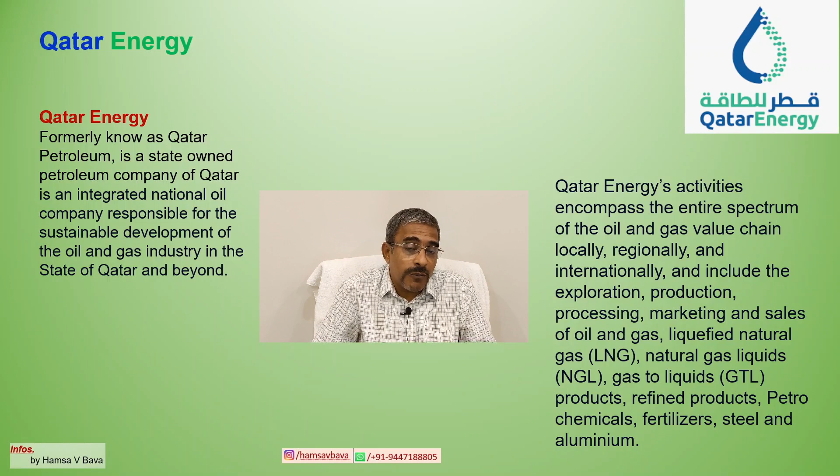One of the world's largest LNG plants is in Qatar. Plus, they have GTL technology there, which is second or third in the world, and the first GTL technology in the Middle East, gas to liquid. We will see what that technology is: it's used in Qatar to convert hydrocarbon, natural gas and condensate into value added and low emission environment quality fuels.

Qatar's hydrocarbon reserves as of December 31, 2019 (data may slightly differ) show confirmed hydrocarbon reserves of approximately 388 billion barrels of oil equivalent. This reserve consists of approximately 1763 trillion standard cubic feet of natural gas, which is their important and huge asset, and 2.23 billion barrels of crude oil and 71.93 billion barrels of condensate. So Qatar is a gas rich country.

They are operating both offshore and onshore. Looking at this overview of Qatar's operations, onshore they have Dukhan, one of the biggest oil fields in the Middle East, in the Dukhan area. Offshore, they have many platforms and production facilities.

Other than this, North Field is a huge gas reserve, and these reservoirs are there. Onshore, they have various other operating facilities. Let us see one by one how to understand each of them.

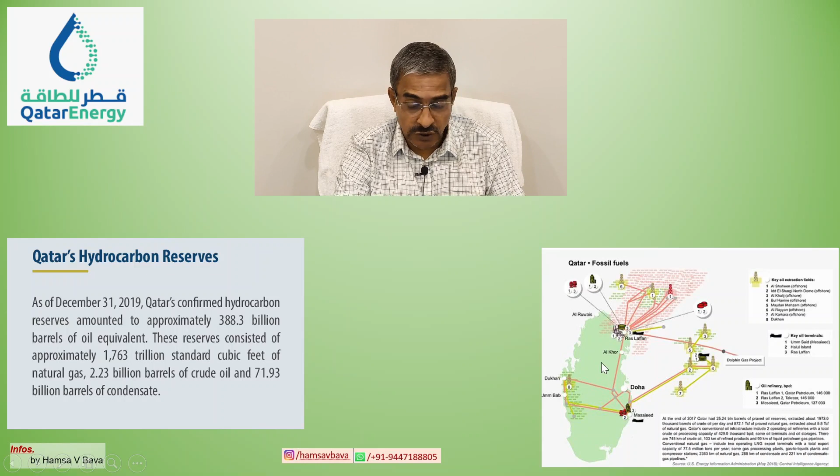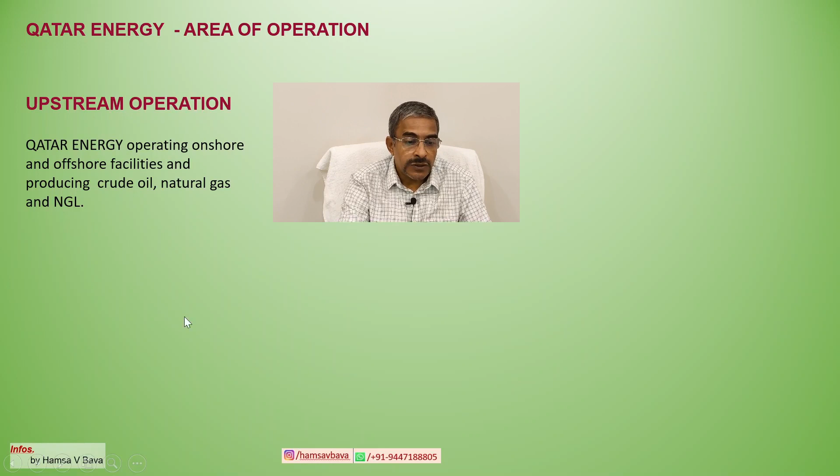In upstream operations, Qatar is producing hydrocarbons - crude oil, natural gas and condensate - from both offshore and onshore facilities. Qatar Energy operates onshore and offshore facilities producing crude oil, natural gas and NGL. From this figure, it is clear they have onshore facilities mainly in the Dukhan area, plus offshore facilities in various locations including North Field. Around five or six offshore locations are producing this hydrocarbon.

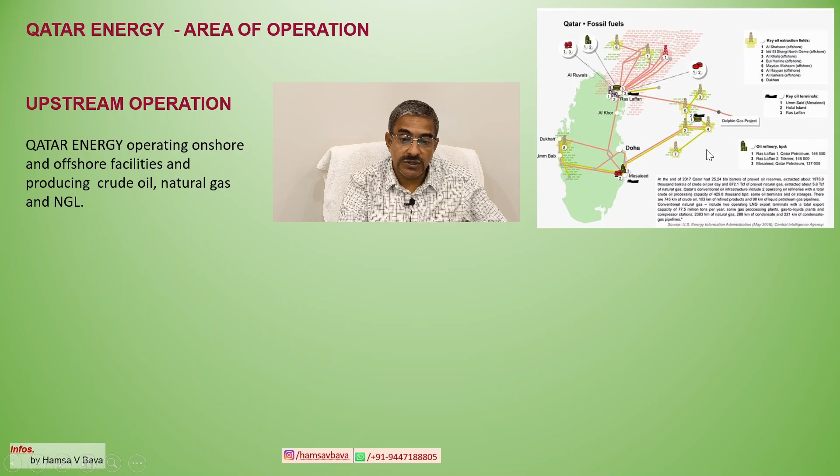They are producing from both offshore and onshore. These are simple pictures available on the website and Google - this is one offshore picture of an offshore production platform, or production facility, and this is an offshore pipeline system in the production area.

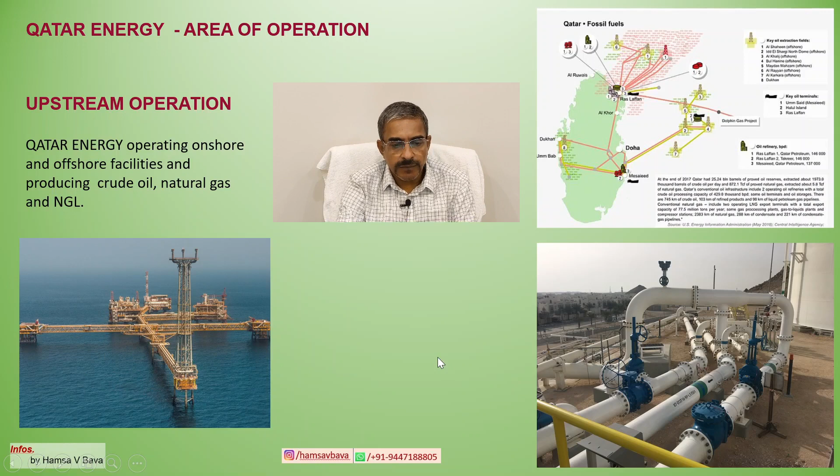North Field is one of the important major offshore fields. Discovered in 1971, the North Field is the world's largest single non-associated gas field, with confirmed gas reserves exceeding around 1760 trillion cubic feet, approximately, according to data available on the website. It is one of the largest single non-associated gas fields, located in Qatar.

Qatar Energy produces natural gas and condensate from North Field and processes it in various facilities, utilizing and improving their hydrocarbon business in various ways. One example is natural gas processing to produce LNG, liquefied natural gas. LNG simply means the liquid form of methane, the first hydrocarbon component.

So liquefied natural gas is operated by a very big company which is called Qatargas, and natural gas and condensate processing at NGL, that is condensate C2, C3, C4, C5. We already studied that in our previous slides. So you have to refer to that one, the basic hydrocarbon, how the carbon chain is working and the various products derived from it. Just review it.

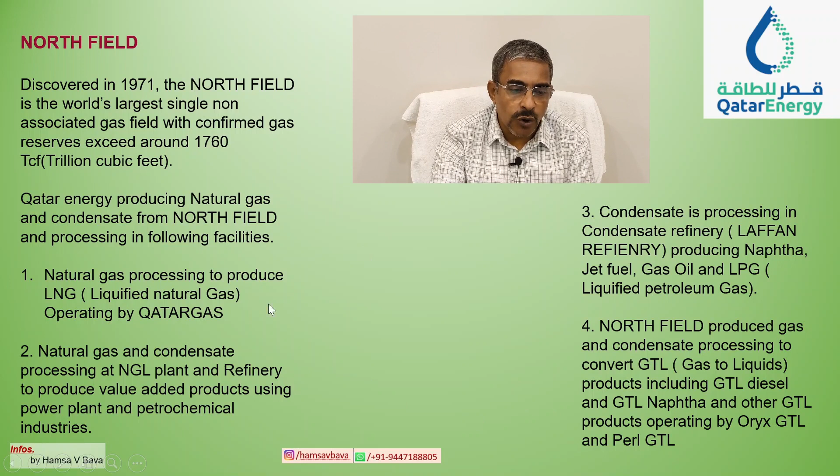So these are the core four operating areas where Qatar Energy is operating, in production and other operations from North Field, and downstream operations, mainly refinery, NGL plant and petrochemical plants. In refinery operation, Qatar Energy Refinery operates to produce a wide range of products including gasoline, diesel, our traditional refinery products, LPG, petrochemical naphtha, that is PCN, light oil, light gas oil and jet oil, etc. to meet local and world market demand.

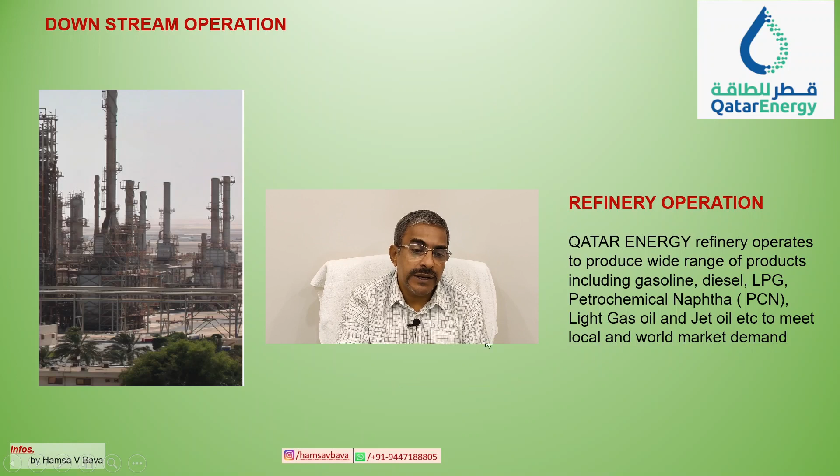So they have one big crude oil refinery there, and a condensate refinery as well. So they are producing value added products for local demand and international demand. And they have two dedicated industrial cities. To provide industrial production and industrial support to the country and to meet the world market demand, they arrange nearby industries in industrial cities.

One of the industrial cities is Mesaieed Industrial City, simply called MIC, and the year of establishment is very early, around 1950, and 10 major companies are operating there. It is all hydrocarbon related plus steel, aluminium and fertilizer. So the major companies are interconnected through the availability of various raw materials. It is a well planned, well organized industrial city.

MIC serves as the industrial hub for producing petrochemicals, chemicals, steel, aluminium, fertilizers, NGL, natural gas liquid, refined petroleum products and many other products. Major companies operating in the MIC area are Qatar Energy Refinery, Qatar Energy NGL plant, Qatar Fertilizer Company QAFCO, Qatar Chemical Company Q-Chem, Qatar Petrochemical Company QAPCO, Qatar Vinyl Company QVC, Qatar Fuel Additives Company QAFAC, Qatar Aluminium Qatalum, then Qatar Steel and the Power Company, plus various small companies. So it is one of the big industrial cities there.

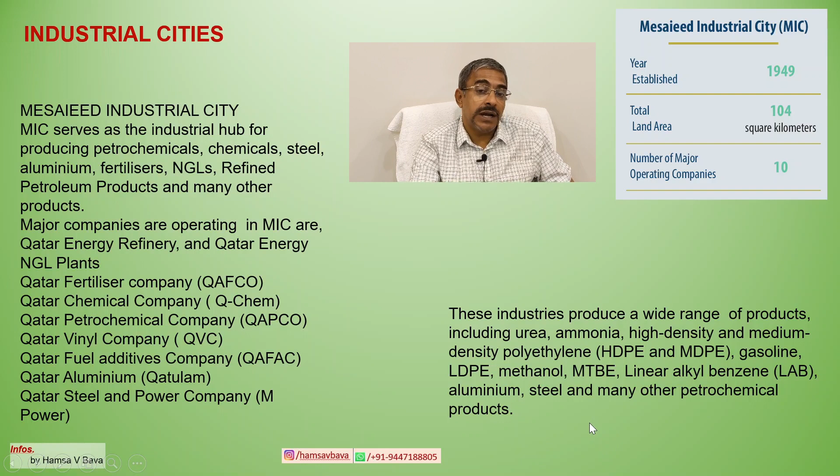The industries in this industrial city produce a wide range of products including urea, ammonia, high density and medium density polyethylene, HDPE and MDPE, gasoline, LDPE, low density polyethylene, methanol, MTBE, linear alkyl benzene, LAB, aluminium, steel and many other petrochemical products. So they are manufacturing from raw hydrocarbon materials: crude oil, natural gas and condensate.

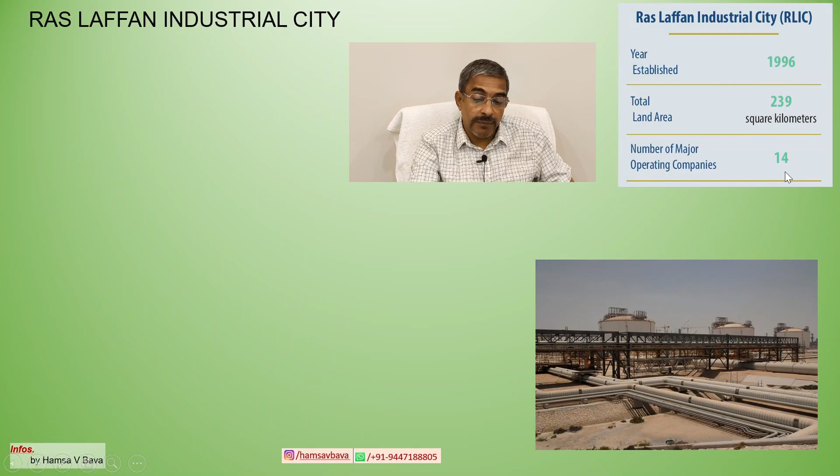Another one of the big industrial cities is Ras Laffan Industrial City, established in 1996, and around 14 major companies are working there, plus some other supporting utility services. So let us see how Ras Laffan Industrial City is working.

Ras Laffan Industrial City serves as the hub for major industries processing natural gas, mainly from the North Field, into high value products such as LNG, GTL products, that is gas to liquid products, lean natural gas, mainly methane. LNG is liquefied methane and natural gas is methane in gas form. Also refined petroleum products and other derivatives including helium and sulfur. So many products are produced through various companies.

Among the major companies operating in the city are Qatargas, Oryx GTL, Qatar Shell GTL, Dolphin Energy, Ras Laffan Olefins Company, Gasal, Ras Laffan Power Company, and Laffan Refinery, etc. So 14 major companies are working there. Definitely some other small companies are also there.

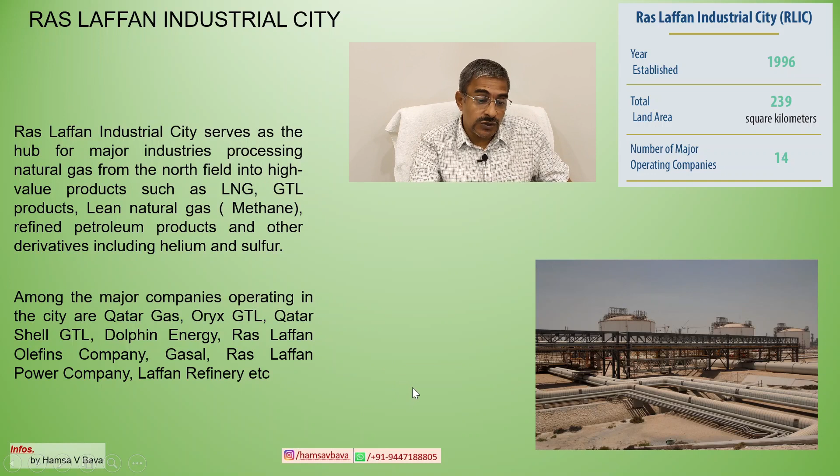So we have to mention the world's premier LNG company, which is operating in Qatar. Its name is Qatargas, under Qatar Energy. So we have to mention it and understand their operations and their portfolio, how they are operating.

So Qatargas is a unique global energy operator in terms of size, service and reliability. The company operates 14 liquefied natural gas (LNG) trains, 14, with a total annual production capacity of 77 million tons of LNG. LNG, remember, is the liquid form of C1, methane. This makes Qatargas the largest LNG producer in the world.

Established in 1984, Qatargas develops, produces and markets hydrocarbons from the world's largest non-associated natural gas field, North Field. So the natural gas is produced from the North Field and brought to the Qatargas onshore facility. The offshore facility is also part of Qatargas.

Then the onshore facility is located in Ras Laffan, at various levels, and they are doing gas processing, removal of contaminants and other things. Then they are processing the natural gas, separating it and making C1, and it is converted into LNG, liquefied natural gas. It is a liquid form of C1. So they are one of the world's premier LNG companies.

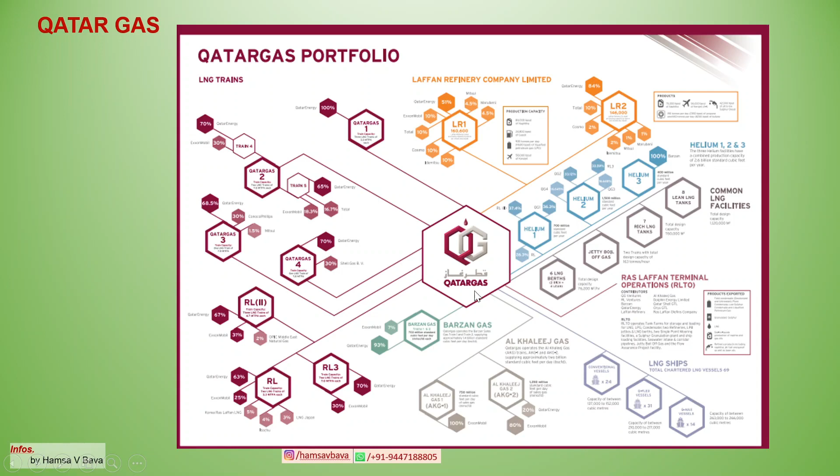It uses gas to liquid technology for converting natural gas or condensate into liquid petroleum products. GTL technology produces better environmental quality diesel, which creates less pollution: low sulfur, high cetane number and low aromatics. So it is an environmentally better, value-added hydrocarbon product used in engines and other things, providing better efficiency in automobiles. So that type of value-added fuel they are manufacturing with GTL technology. So this is one of them.

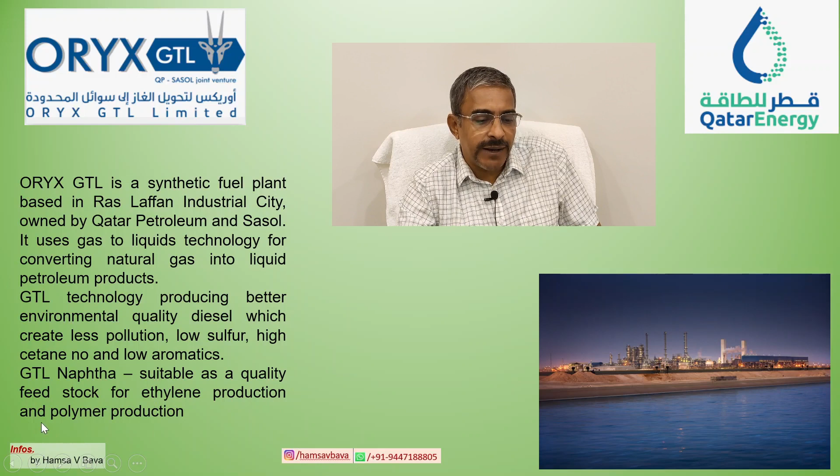It's a new technology. Besides diesel, GTL naphtha is also suitable as a quality feedstock for ethylene production and polymer production. So Pearl GTL is also another GTL plant. Pearl GTL is a gas to liquid plant based in Ras Laffan, Qatar. It converts natural gas into liquid petroleum products.

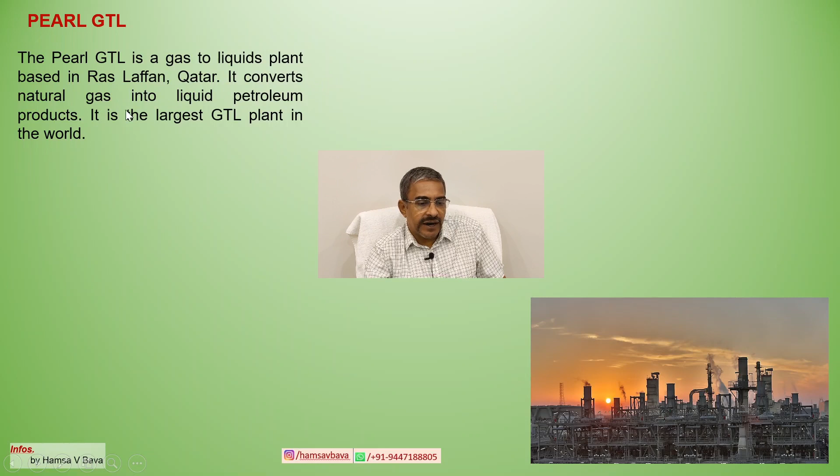It is the largest GTL plant in the world, with the collaboration of Shell technology and Shell oil company, one of the biggest oil companies in the world. Developed in partnership with Qatar Petroleum and Shell, Pearl gas to liquid is the world's largest GTL plant and one of the world's largest, most complex and challenging energy projects ever commissioned.

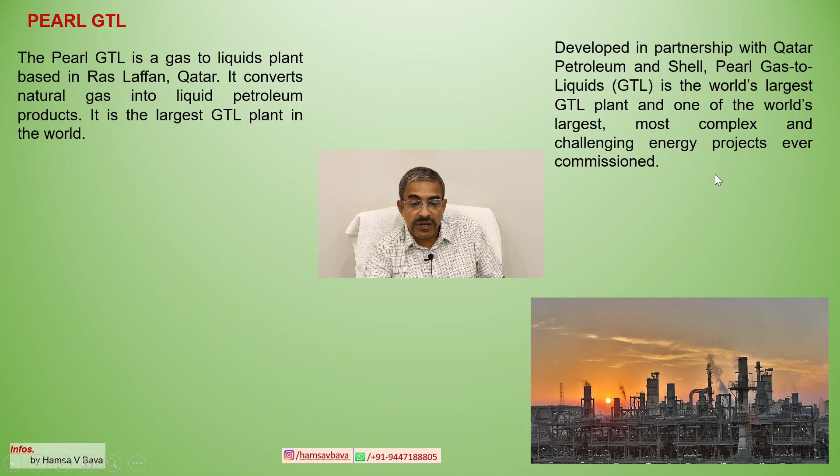GTL products represent a pioneering innovation to increase the supply of highly demanded liquid hydrocarbons. Pearl GTL products are virtually sulfur free and have practically no contaminants such as heavy metals or aromatics. Their paraffinic chemical nature ensures that they are highly biodegradable and almost odorless.

When GTL gas oil is used in automotive applications such as buses, it can help improve local air quality, such as soot, and improve emission standards when compared to the use of conventional diesel fuel. So GTL products are of much better environmental quality than the earlier traditional diesel, gas oil, naphtha or other products. So 2 GTL plants are operating in Qatar.

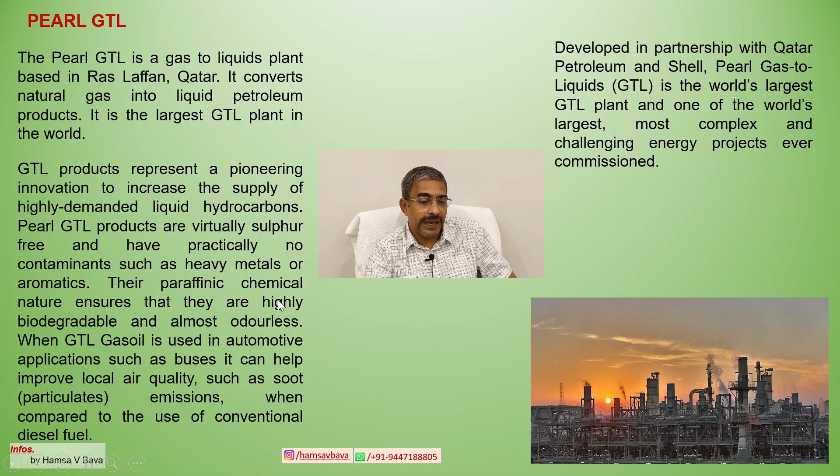So mainly we have two types of refineries. One is the crude oil refinery, producing main products like LPG, gas oil, petrol, furnace oil, lubricants and other things. The condensate refinery is a different operation, the concept is slightly different: it processes mainly condensate, producing low sulfur products or naphtha, mainly low sulfur diesel, butane and propane, etc. These are the main products. So there is some difference between both refineries.

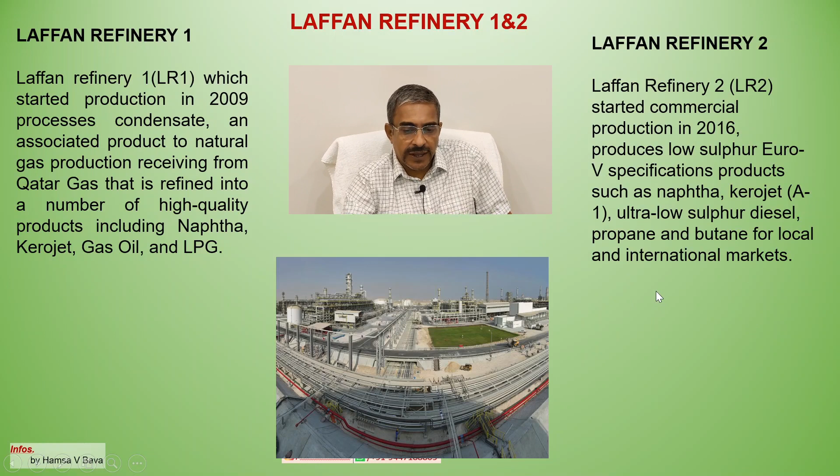Then another company is Dolphin Energy, working on a different concept. Let's see that one. Dolphin Energy produces natural gas from the same giant North Field gas field and processes it to remove condensate and other higher hydrocarbons in their Ras Laffan facility. They bring North Field gas to Ras Laffan in Qatar, compress it and separate condensate and heavier hydrocarbons like ethane, propane, butane and pentane, plus moisture, contaminants, H2S and CO2, like all gas processing.

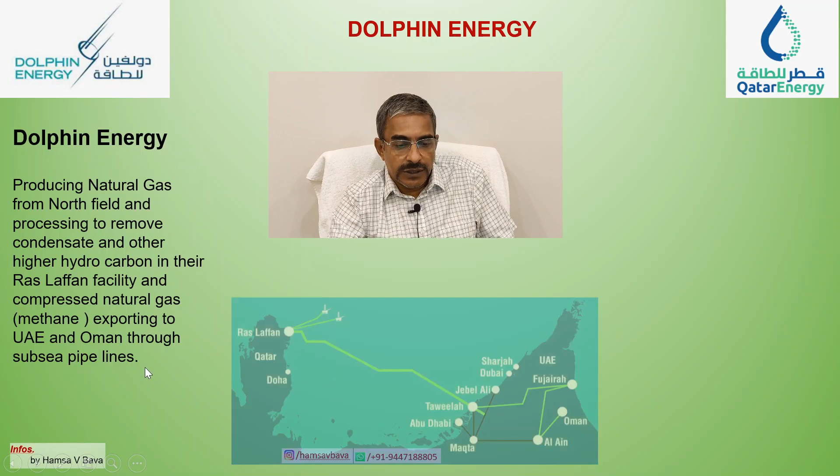Then they export this natural gas to UAE and Oman, neighboring countries, through subsea pipelines. They compress the natural gas and use a subsea pipeline to export to other countries to meet Middle East gas and fuel requirements. So this is the map for this one. This is the North Field area. They produce natural gas and condensate from here and bring it to Ras Laffan industrial city in Qatar, where they have gas processing and export facilities.

From there it first reaches UAE near Abu Dhabi, at Taweelah, which is maybe the shortest distance. From there they may do some minor treatments like removal of moisture or water content, or increasing the pressure. They distribute this gas to meet demand in the entire UAE. Jebel Ali is one of the biggest industrial cities. They supply the Abu Dhabi area plus Fujairah, so the entire UAE, plus they have a transport facility to Oman to meet Oman's requirement. Oman is another country in the Middle East.

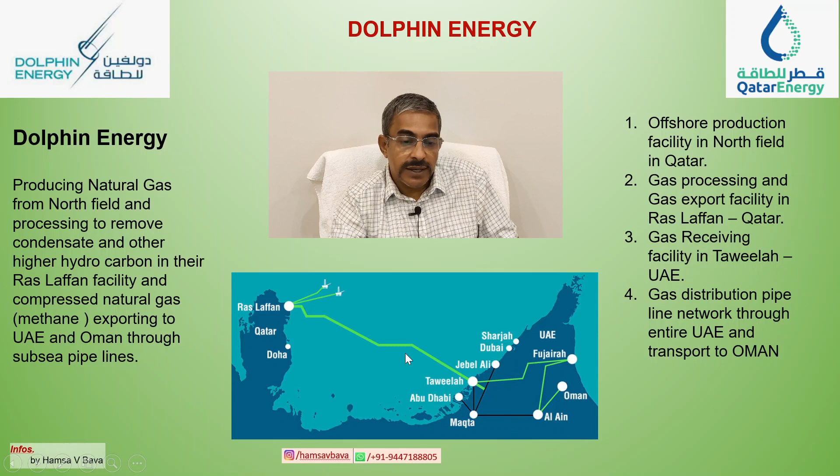So this is a new concept, started around 2007 I think, Dolphin Energy. It is part of Qatar Energy and Qatar hydrocarbon development and business. They have an offshore production facility in North Field in Qatar, gas processing and gas export facility in Ras Laffan, here, a gas receiving facility in Taweelah, UAE, here, and the gas distribution pipeline network through the entire UAE and transport to Oman. So this is Dolphin Energy.

Other major industries I'm not going into in detail. QAPCO is one of the major chemical companies, producing low density and high density polyethylene. QVC is a chemical company manufacturing various chemicals using hydrocarbon feedstock from Qatar Energy. Qatar Steel manufactures steel using feedstock from the hydrocarbon and metal industries, and Qatar Aluminium is another major industry. Then QAFCO, Qatar Fertilizer, produces urea, ammonia and other chemicals. These are only some of the major companies, not all.

There are many other companies, like jet fuel producing companies. New technologies and new petrochemical plants are coming in Qatar, and petrochemical industrial cities are expanding. North Field expansion and LNG production capacity are increasing. In recent years they are investing in the hydrocarbon industry, exploring more and more possibilities.